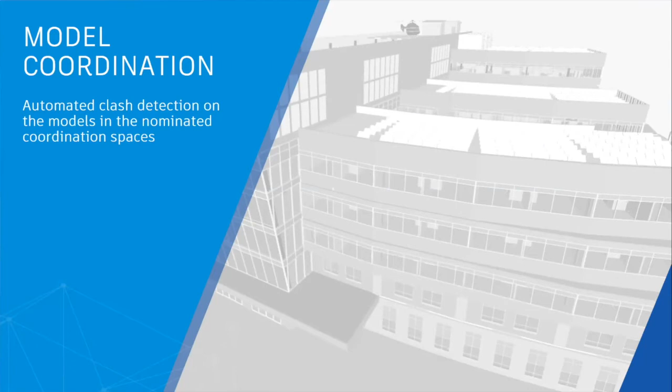And what model coordination then does is it runs the clashes between all the models sitting inside the coordination space automatically. It shows you this matrix of all the clashes. You can easily review clashes without waiting for coordination meetings every fortnight or whatever it is. And you can start resolving some of these basic problems. Most importantly, you can filter and group clashes.

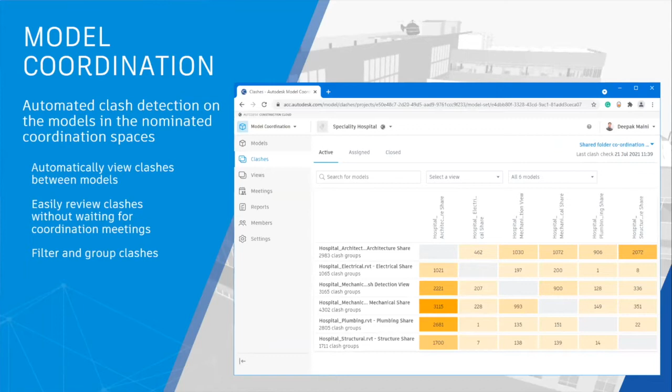And my favorite, you can mark clashes as non-issues for clashes that you know would not really happen. So for example, valid penetrations. Maybe you decide not to model penetrations on your project, or at that stage of the project. So you can then convert those clashes into non-issues.

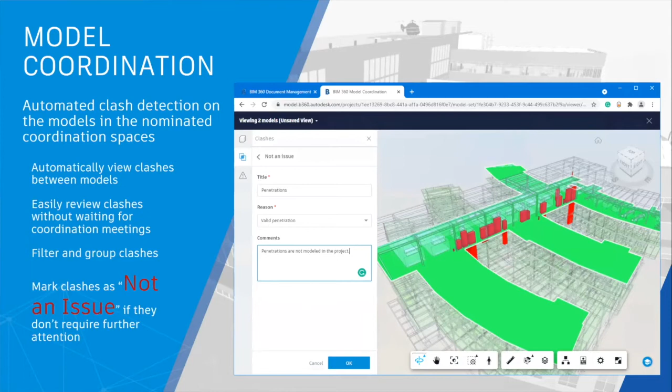And this is my favorite part of it, because whenever it comes to clash detection, I always tell people that a fully coordinated model does not mean clash-free. It means clashes detected, reviewed, and approved. So yes, we found the clash between the slab and some of these elements penetrating through it, but then we have decided to not model penetrations. As a result, we can convert those clashes into non-issues.

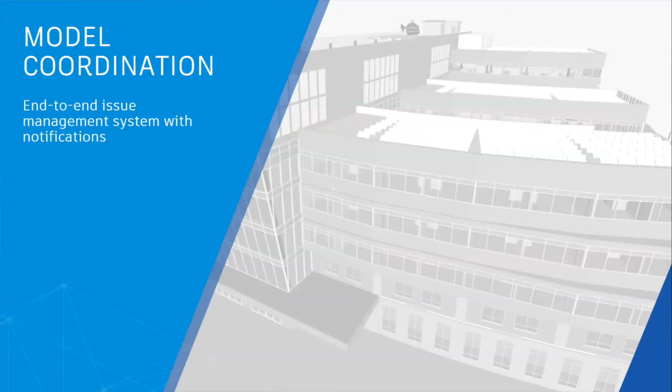It's also powered by an end-to-end issue management system. Now, the reason I call it an end-to-end issue management system is because you can take clashes and assign those clashes as issues to the individuals or roles or companies that need to fix it. Once you have assigned these issues, they can then be downloaded in programs such as Navisworks, or even in authoring tools such as Revit.

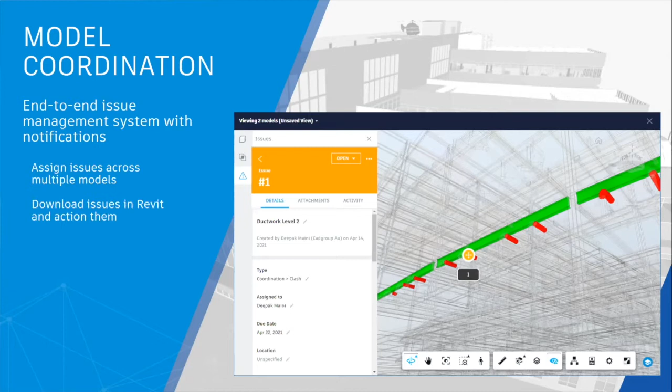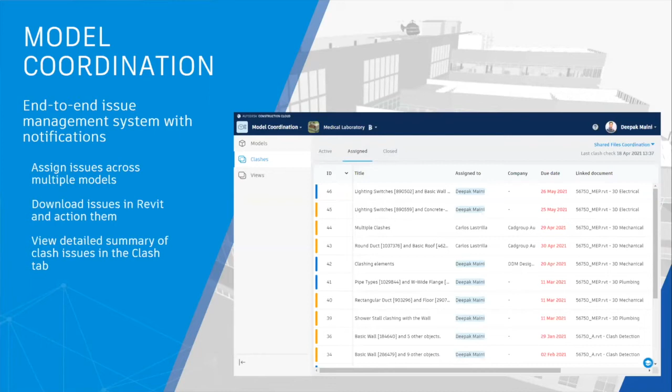So if Revit is the authoring tool of choice for the project, then you can download those issues inside Revit and take action on them. But most importantly, you can also change the status of those issues after you have reviewed and actioned those clashes. And then you can look at the detailed summary of those clashes and the issues associated with them inside the model coordination module.

Now, anybody who knows me knows that I love live demonstrations. Plus, it's the conference about technology in construction. So I actually want to show you a live demonstration of this as well. Let me switch over to my Google Chrome window. So currently I'm in the model coordination module. I have nominated my shared folder as my coordination space. That folder has got all these different files, models, and views, and it's showing me this clash matrix of all these.

Now, on some of the larger projects, especially the healthcare projects and so on, this matrix could actually grow as a massive table. And this is where we could actually go and filter these clashes based on the models or views that we want to look at. So let's say in my case, I only want to look at clashes between mechanical and structure. So I'm going to pick these two.

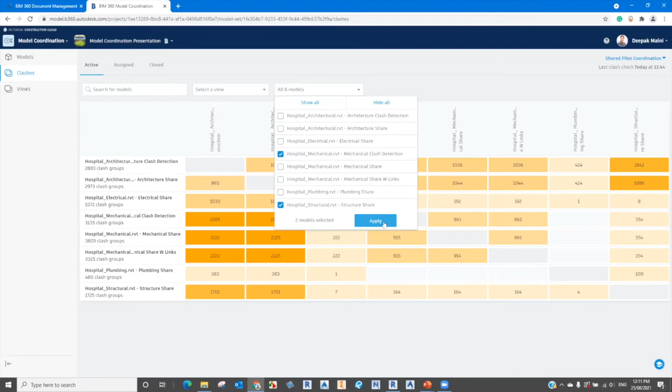I'll hit apply. What it now does is it filters the clashes automatically. So I'm not doing anything. It is filtering it automatically and saying that if grouped by mechanical elements, there are 354 clashes. And if grouped by structural elements, there are 164 clashes. Now, because mechanical elements are the ones that I'm going to modify, I'm going to click on this group here.

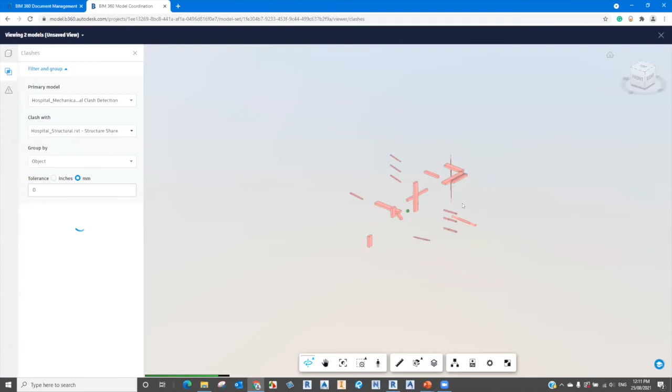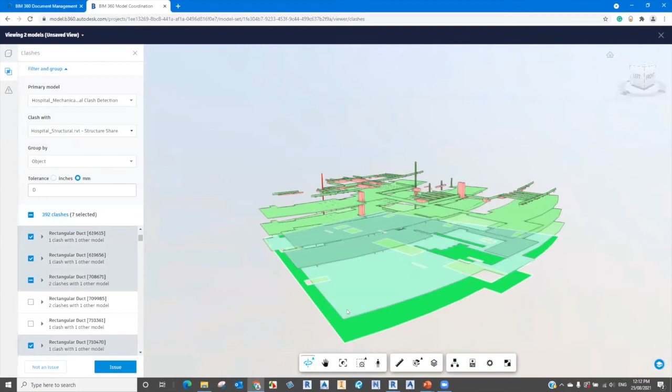So the program now goes and federates the mechanical and structure model and shows me the clashes here. So now in here, it's telling me the total number of clashes, not the groups anymore. I can now go and review these clashes. But most importantly, as I mentioned earlier, I can go and click on, let's say, this element here. So this slab is clashing with 7 elements.

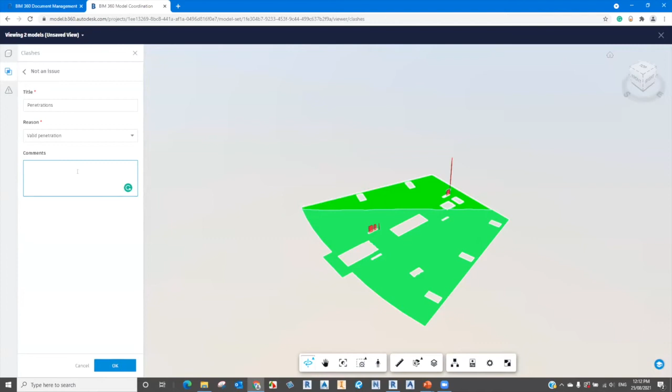I could actually now convert this into non-issue. So I can click on not an issue and I can go and say these are, let's say, penetrations. And for reason, I could go and say that these are valid penetrations. And I can add a comment here that at this stage of the project, we are not modeling penetrations. And as soon as I go and say okay here, it now actually ignores those clashes. So I can look at the remaining clashes.

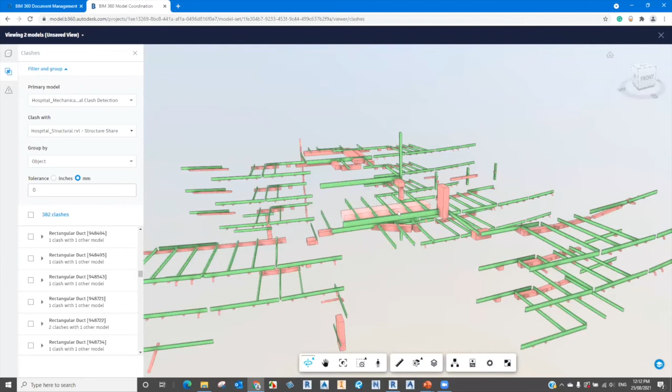Similarly, I can go and click on these elements here. And I can also go and ignore these clashes and say these are, let's say, valid penetrations. Now, the really cool thing is, although I have ignored these clashes right now, later on in the project, when we decide to model penetrations, I can actually go and restore these clashes so we can then review them as well. And now I can concentrate on real clashes on my project, which in this case are all these ductwork and all the other related duct stuff clashing with the structural steel.

Let's start with this particular clash here. So I can see here that this duct is clashing with all these different beams. So a really cool thing is I can click on this duct here. And as soon as I click on it, the program automatically groups all these 5 clashes and it selects them. Now I could go and say that this actually is a problem.

But before I do that, I could actually go and define a tolerance for my clash. So let's say at this stage of the project, we decide that if the clash is within 10 mil, we can ignore it. So I could go and say 10 mil tolerance here, enter. As soon as I do that, instead of showing me 382 clashes, it's now reduced them to 356 clashes.

So again, a really cool way to say, all right, at this stage of the project, we are working with 10 mil tolerance or 20 mil tolerance and so on. And as you progress through the project, you can actually start reducing this number here. So even the automated clashes can work with the tolerance values here.

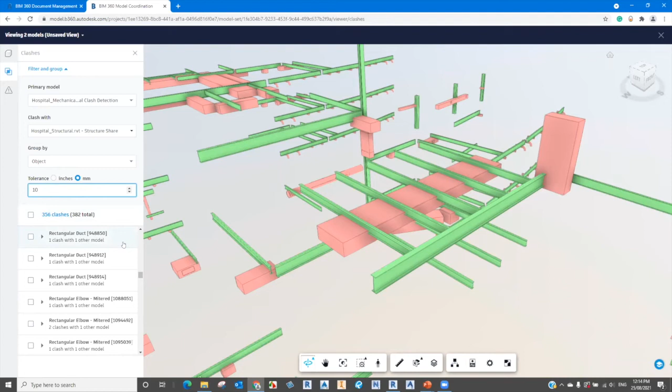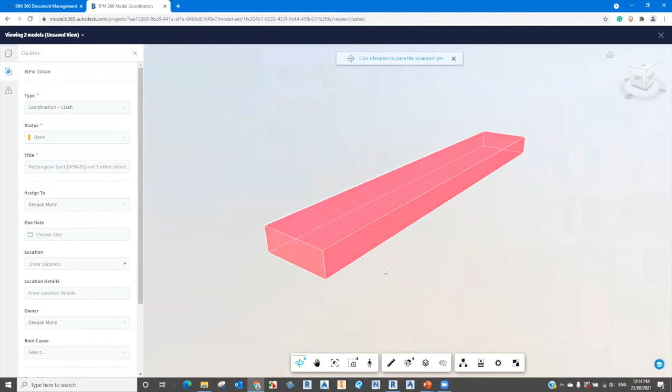So going back to this particular duct, I'm going to pick this. It now picks 5 clashes. And now I can say that this actually is a problem. I'm going to click on issue here. It says, how do you want to place the issue pin? I can spin the model around and I can say I want to place the issue pin somewhere here. And the whole idea is that the pin is placed on that duct element.

And this is the orientation, which means that when I'm looking at this issue, this is the view that I'm going to look at it from, which makes it easier for me to review the clashes. It is currently assigned to this user. I can go and define a due date. I'll say this is due by next Tuesday. I can also go and define location if my project had locations defined. But most importantly, I can go and define root cause.

Now, in case of root cause, the whole idea is I can go and define a root cause for this particular issue. And the program gives me the insight page, which is like my project homepage, on which I can display different dashboards. And these dashboards can show me all the different information that I need to look at in my project.

And one of the cards that I can display on my dashboard is issues by root causes. So the whole idea is I can then display all the issues by their root causes, which means that I can concentrate on the root cause that is causing most problems on my project, which means that if I need to organize trainings for my team or whatever it is, I could organize that.

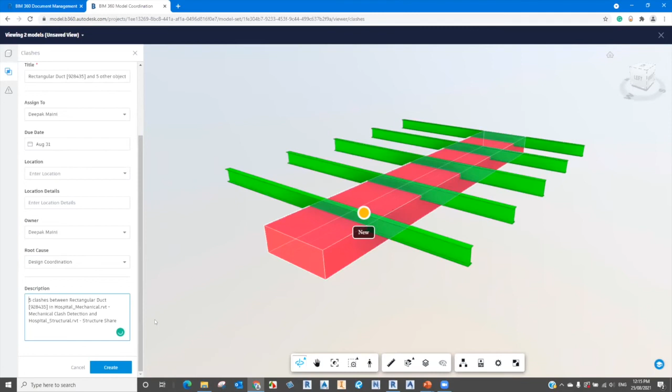So in this case, that's a design coordination issue or root cause. And in here, I can go and define the details of how much I need to move these elements down by. If I don't know how much I need to move these elements down by, I also have the measure tool here where I can go and measure the distances between, let's say, the elements here or the elements here and so on, and go and pick how much I need to move these down by. In this case, I'll go and say, move down by 220. I'll go and say create.

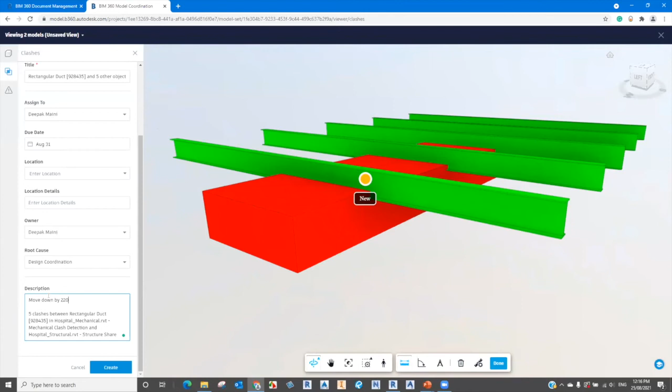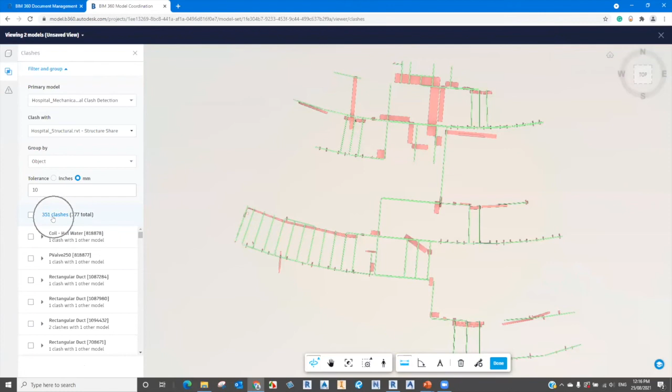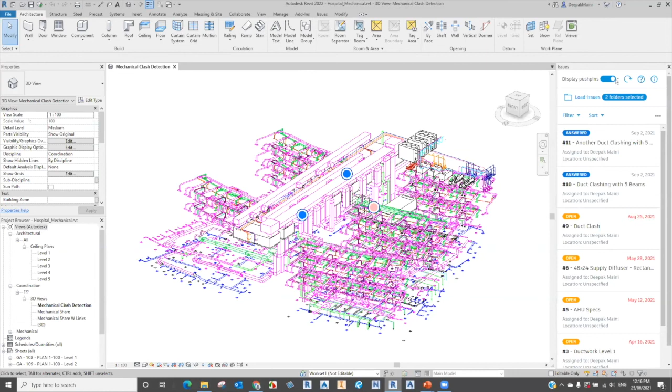So now as soon as I click create, that user who this issue was assigned to automatically gets a notification. And my total number of clashes have reduced here as well, because that particular clash, we have assigned that as an issue. Now, the best part is this is where the end-to-end issue management system is really handy. If I'm working with Revit, and if Revit is the software of choice for this project, I can now download that issue inside Revit. So if I hit the refresh button here, I'll go and say refresh or reload. It now reloads all the issues.

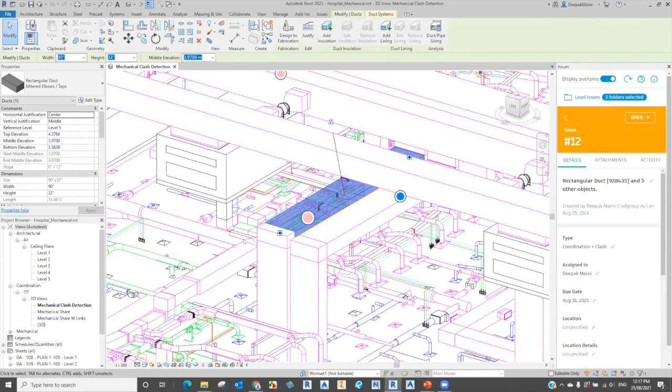Excuse me. And now I can see this issue number 12. And the really cool thing is, as soon as I click on this issue number 12, the program would open the 3D view on which that issue was created. It would then even go and highlight the element or select the element that the issue pin was placed on. And I can now go and look at the description here to see what I need to do.

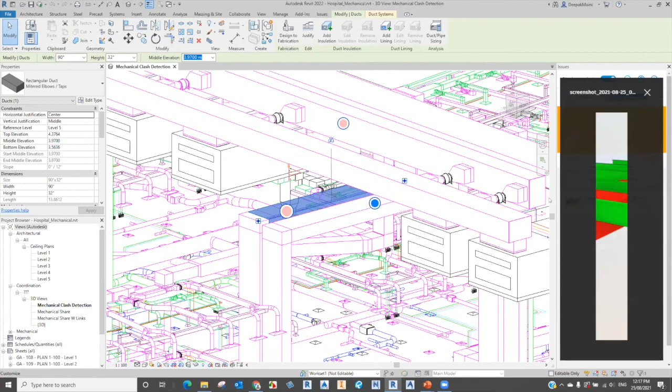But most importantly, if I go under attachment, the program also attaches a screenshot. So if I resize this issues panel here, I can look at the screenshot here to see what the actual clash looked like based on the orientation of the issue pin that we placed. Let me change it back. I'm going to close this. So now I can go back to details, and now I can start taking the action.

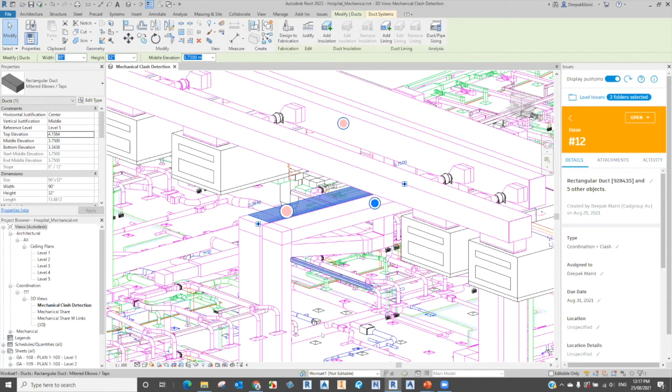So let's say I need to move this down by whatever that value, let's say 220. So I could go and change this to, let's say, 4.15. And as soon as I press enter, I can see that the element now updates. Now, when the element is updated, I can straight away go and change the status of this issue here. If I go and change the status to answered, I can add the description here.

So let's say: issue updated, you will see the changes in the next share. I'll go and say done. So now I changed the status of the issue from inside Revit. And as soon as I change the status, the person who initiated the issue automatically gets a notification.

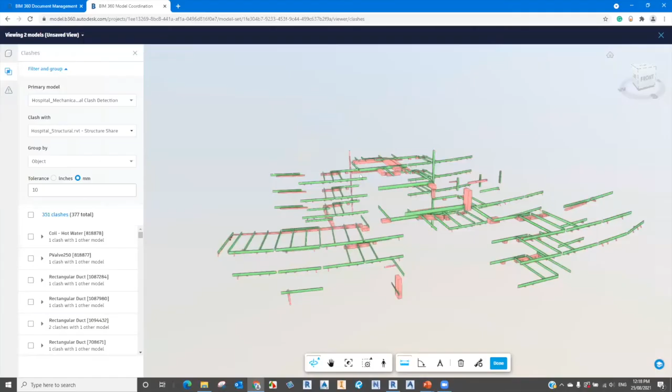And when they go into the Chrome window in model coordination, and when they go into the issues, as soon as they hit the refresh button, they can actually see the status of the issue updated here. So this is the end-to-end issue management system that I was talking about. And once the new package is shared, they can then click on the issue to see whether it has been resolved or not. And if it has been resolved, they can close the issue.

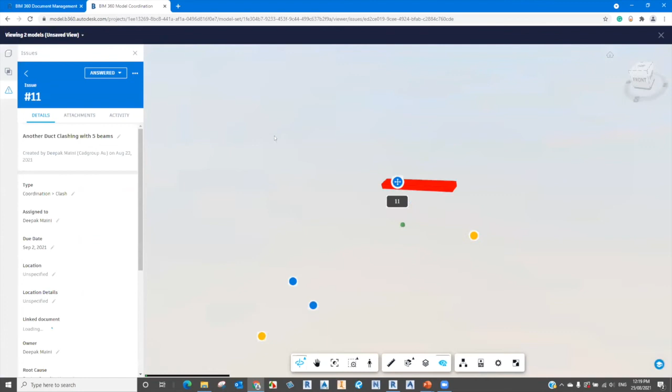So for example, let's say we have this issue that was changed to answered. If I click on this issue here, it now again opens the model, federates the two models together and shows me the issue. If the issue is resolved, it would change the status of the elements to the model color. But if it is not resolved, it will still show me these clash colors. If I look at the attachments, the original attachment showed the clashes between these 5 elements. Looks like the clashes with 4 elements have been fixed, but there's a clash with 1 element still there.

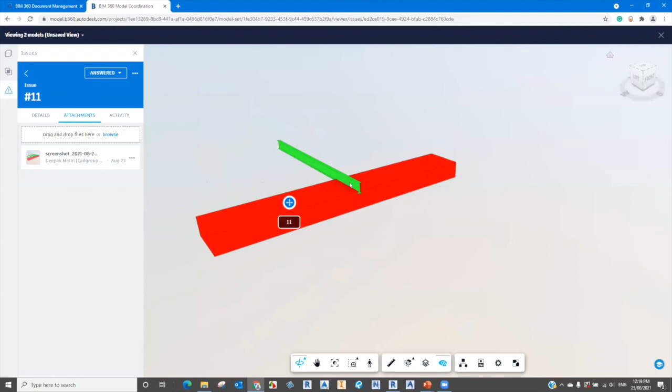So what I could do is I could change the status of this back to open. I could add the description here. Let's say move it further down by 35. I'll go and say done. So the status of issue number 11 changed to open again.

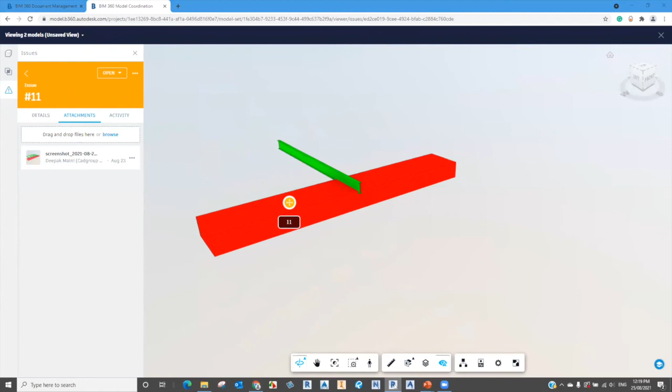And if I go back into Revit and quickly hit refresh, we can see that the issue number 11 is changed back to open. And I can go and look at the activity, and I can see what was the last comment here. So this is the end-to-end issue management system that we've got available inside our program.